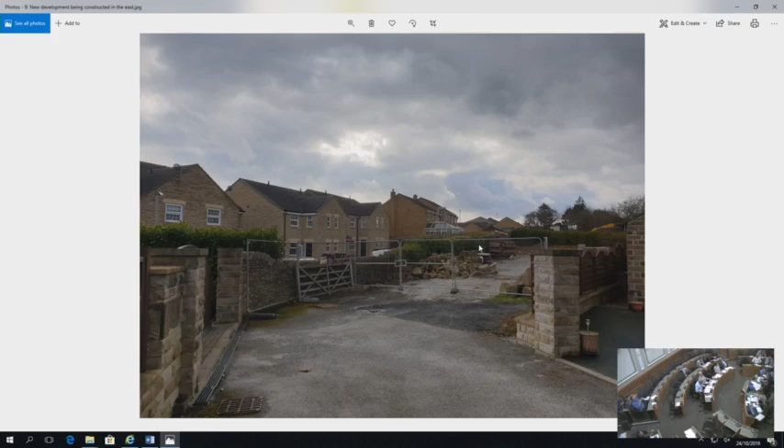Another site photo of the site showing Skelmanthorpe in the background. This photo is showing the construction of several properties, which is part of the same site allocation, but not related to this particular planning application.

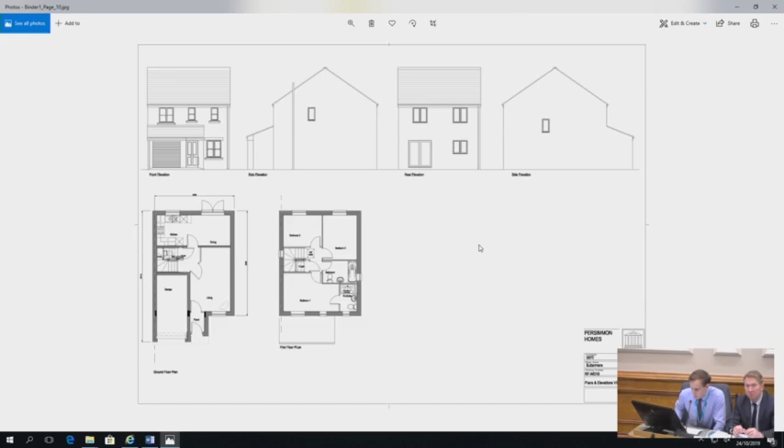Officers consider that the proposal achieves the appropriate density and mix of dwelling houses, and 20% would be affordable and would be secured by a Section 106 agreement. As such, officers consider that this proposal would contribute in creating a balanced and mixed community in line with policies LP7 and LP11 of the local plan.

During the course of the application, the Highways Development Management officers sought additional traffic surveys and key junctions to be reassessed, as well as committed development to be also looked at. This information has been carried out fully, and officers now back the proposal.

In addition, a number of changes were sought to the layout with regards to car parking, and also in terms of ensuring that a bin lorry could safely navigate around the proposed streets. Officers consider that the proposal will not have any adverse effect on highway safety and is in line with LP21, as well as the guidelines in the Highway Design Guide, as well as Manual for Streets.

However, to encourage residents to use sustainable methods of transport rather than their cars, a contribution has been agreed with Persimmon for a residential travel plan fund of £95,095 and a travel plan monitoring fee of £10,000, with £2,000 instalments for 5 years. This would again be secured by Section 106 agreement.

This discharge of surface water issue is probably the most significant issue in the southern area. Maps from 1850 show a watercourse originating west of the proposed site and flowing through the site and beyond towards Huddersfield Road. Maps from 1892 indicate the section through the proposed site has been culverted. Recent site investigation works confirm a 450mm piped culvert. It's unlikely that was done in the 1800s, presumably this was done more recently. The watercourse is culverted beyond Beedale Drive.

The current EA risk of flooding from surface water plans indicate high risk of flooding in several locations, immediately west and immediately east of the proposed site, just prior to Beedale Avenue, in the area of Heatherfold, and just prior to Huddersfield Road. The FRA and the LLFA believe the flooding is caused by a submerged outfall downstream of the site, but as there are several areas where the flow is interrupted, there must be more than one restriction to flow. How would all of these restrictions be located and rectified, as everything downstream of Beardale Avenue is culverted below ground?

If any restriction prior to Beardale Avenue was removed and the 450mm culvert through the site replaced, then the flow would increase because of the natural flooding west of the site, which provides attenuation. However, as there are obviously restrictions beyond Beardale Avenue, the extra flow would back up and increase flooding west of Beardale Avenue. It is proposed the new 450 diameter culvert would be connected to the open watercourse via a new manhole. This cannot be achieved, as the outlet from the manhole is below the invert of the stream.

It is proposed the section of watercourse immediately downstream of the site will need to be desilted so as not to restrict flows from the culvert. This will not prevent the increased risk of flooding upstream of Beardale Avenue unless flow restrictions downstream of Beardale Avenue are cleared. How will access be gained to the open watercourse? This would, in effect, create an easement which riparian rights holders would fight in the courts to prevent further flooding.

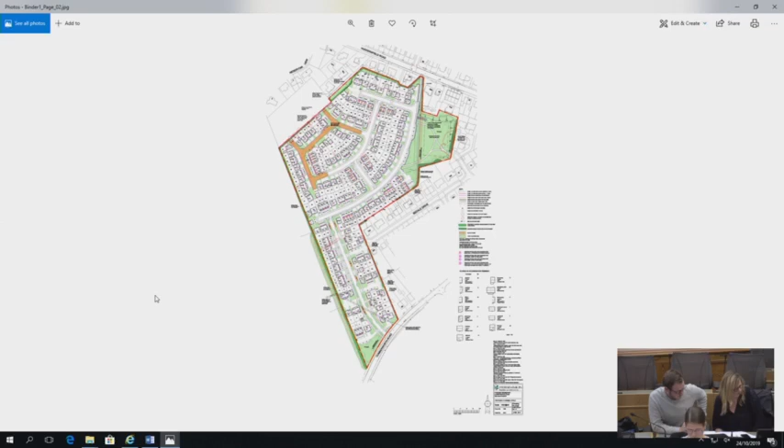Chair, thank you. As always, when you go last in these things, you tend to try and repeat what's gone before. But firstly, can I thank all those who have spoken against this application this afternoon with such knowledge and commitment, and I support all the material objections made so far this afternoon, so there's little point in repeating many of those in great detail.

So I just want to reiterate the important reasons for objections. Firstly, what I would describe as a footpath to nowhere. It's not needed and seems ill thought out, a very simple solution to previous comments about the lack of paths. It shows the developers have failed to develop a logical solution and have simply gone for an easy option, which seems to be the case in many parts of this application.

Boundary treatment, as referred to on page 119 of the local plan allocations, states that boundary treatments are required, and this application fails to address this sufficiently. We are all aware that we have a climate emergency. This council is one of the first in the country to sign the declaration of climate emergency, and yet the boundaries are not tree-lined. This would be an ideal opportunity, should committee be minded to approve this, to improve tree coverage, clearly stated on page 119 in the local plan allocations. Again, trying to do something possibly on the cheap, shall we say.

The update referred to earlier contains reference to the connection with the existing watercourse to the south of the site, and 5k has been set aside for any work required. Clearly, anyone who knows anything about drainage or building knows that 5k is woefully insignificant, won't touch any significant works needed there. So that alone is, again, we all know what the current developers' business model is - trying to do it on the cheap. 5,000 will not address any serious issues in that area.

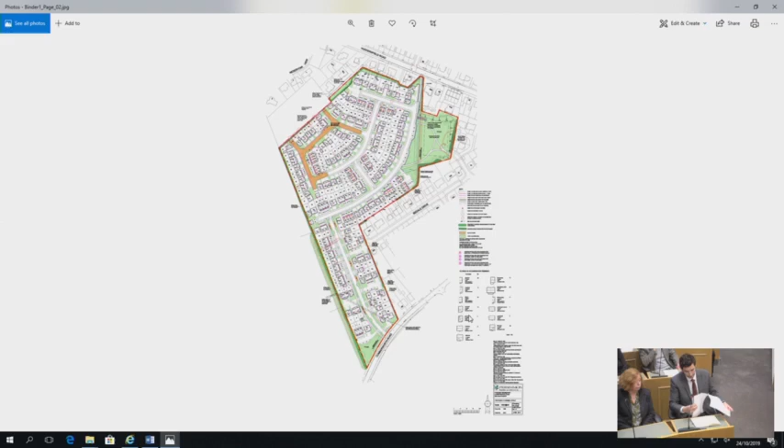Members, it's over to you. You've enough there to be going on with. Mohan.

Thank you, Chair. I've gone through this report very carefully last night and I've been on site visit this morning. But here, I'm really surprised to hear so many objections. Yeah, it seems to me they are right objections. Yeah, I had in mind only a few.

Although this application has some good merits by Section 106 contribution towards education and other things, affordable houses, but there are still some other things we need to look into. Like that, got affordable houses. I don't like affordable houses to put 8 or 10 houses on one side. It should be spread over 190 houses, not put a block of affordable next to the existing property.

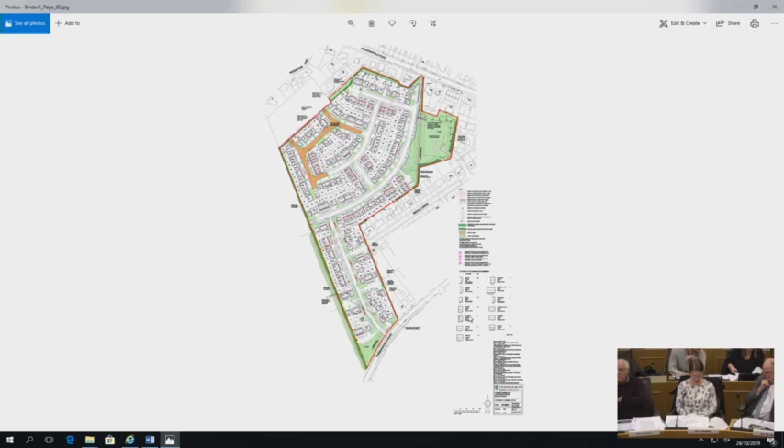Thank you, Chair. There's a couple of key issues concerning me a little bit about this application. The first is in relation to the culvert at the south of the site. Looking through the application, it does mention the contribution to the downstream area of £5,000, which has already been mentioned is not a significant quantity of money. The report also notes that it's not the responsibility of the builder to deal with that.

But I'm a little bit uncomfortable with it in general, because you've currently got a blocked culvert that's underground, and you're putting a development over the top, you're going to unblock that. What you're naturally going to do is create a lot more free-moving water, which is going to naturally find itself in that watercourse downstream of the site. In that case, you are potentially creating an issue for those dwellings who have the watercourse at the bottom of their garden, in that all of a sudden you're increasing the flow rate into that area.

I'm just not comfortable with the contribution. I know they're saying it's not the responsibility of the builder to deal with that, but I just kind of feel that this developer is doing a lot of work which is going to increase the flow rate. Is that something that needs to be looked at in a bit more detail?

The second key concern I have is in relation to the access, which has also already been mentioned, in that I do feel there should be two access points. Coming down Cumberworth Road, particularly at the top, I'm sure Highways agree it is, in terms of policy basis, an acceptable road, but looking at it with my eyes, it does seem relatively narrow.

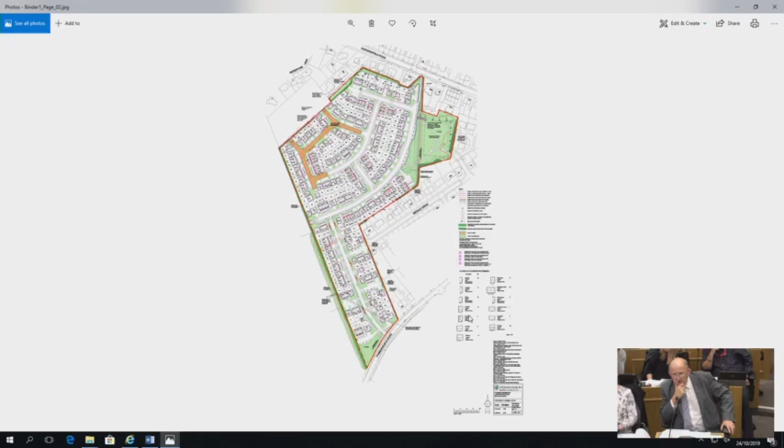Finally, I have concerns about school provision. Shelley Academy, Shelley College, not sure what they call it nowadays, but it doesn't have a massive amount of spare capacity. We're short of options. At the other side of my ward, we're losing, or maybe losing, Almondbury Community School, which is going to put pressure on things, because some of my children at the moment go over that way. It's going to put more pressure on Shelley School, College. There's not necessarily the capacity there to cope with these sizes of developments.

Most of these are family houses. The simple fact is people will be moving in with ready-made families. It's not as if we've got five or six years before they produce children of school age - they'll be moving in with children of school age and at different school ages. We need to be very, very much aware of that. I did hear Kirkburton Middle School mentioned - it's not got a great deal of spare capacity there either. Thank you, Mr. Chair.

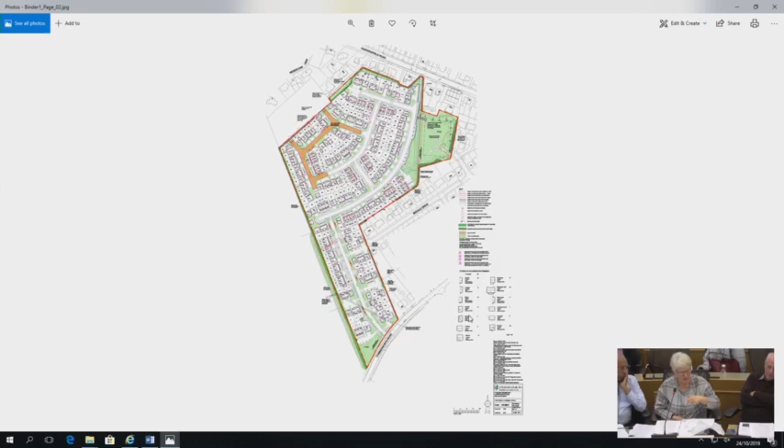Thanks, Chair. The only question I've got, and I'm probably going to answer it myself, is why is St Aidan's not mentioned? And I think that's because this development isn't in its catchment area, I presume, and therefore the only schools - the report says that the only schools in the catchment area are the two mentioned that are receiving funds.

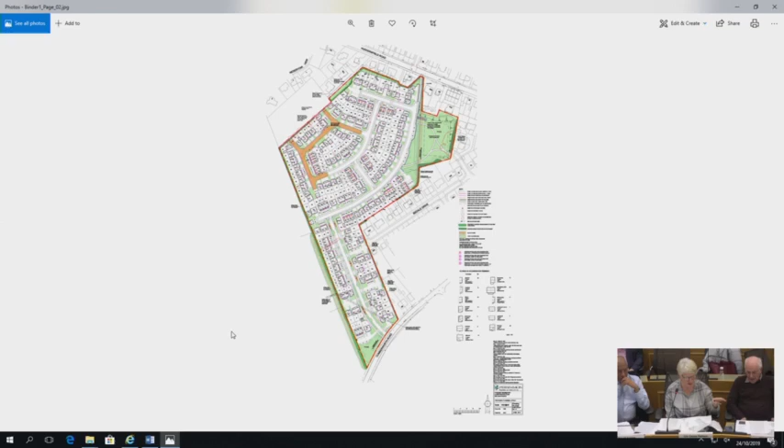This application, as colleagues have said, is in the local plan for housing, which does make it very difficult to do anything with it other than housing. We do have to get it right, though, to make sure it's the right application. So, at the moment, I'm not saying whether I support deferral or not, but... have I answered my own question?

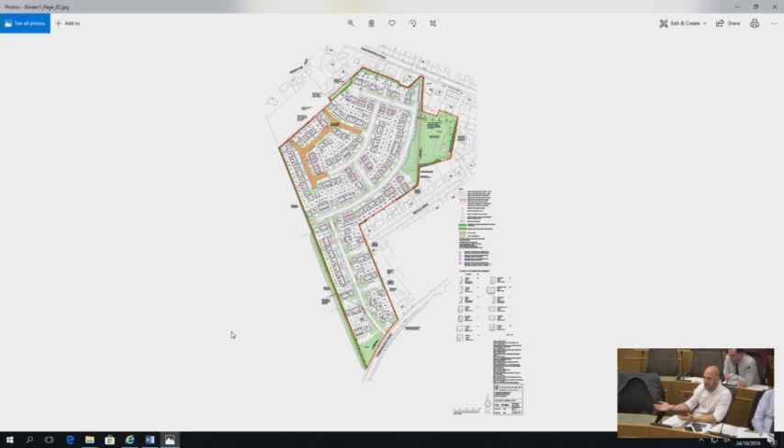Thank you, Chair. I've listened quite closely to the residents and members' debates. We are dealing with a site that is allocated for housing, as has been pointed out. That means that if we go for a planning decision, we follow what the plan says. The plan says this should have housing on it, so, okay, in principle, it will have housing. However, the detail has to be right, and a lot of what's been discussed today is about detail - comments about drainage, comments about access, comments about schools. I don't accept the comment about predetermination because no decision has been made on the application.

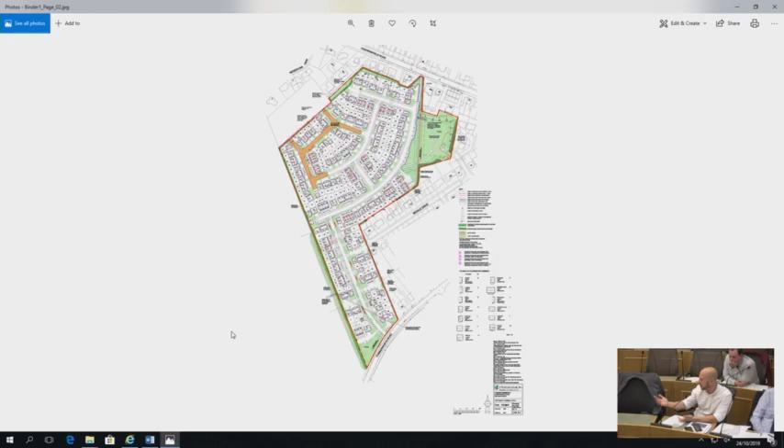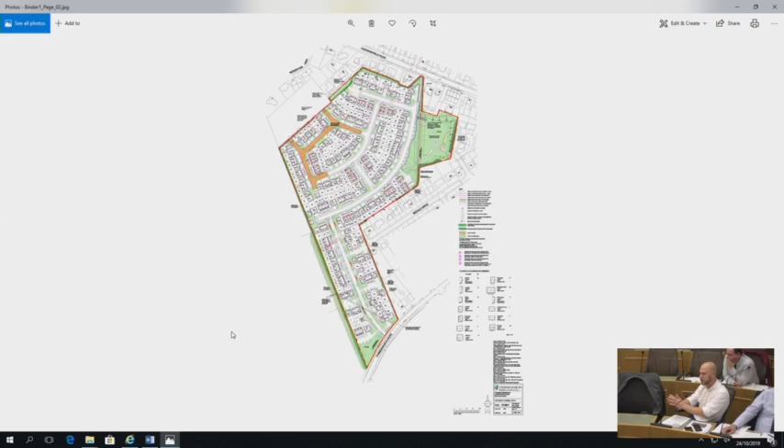But I am mindful, listening to the debate, that one, I think we should explain through the highways officer why it is a single point of vehicular access, albeit multiple foot and bicycle access points. And you need to hear from your drainage engineer to respond to the concerns rightly expressed by residents, echoed by members and local members in particular. Now, it could be that you do decide to defer - that's fine if that's what you choose, and we can bring back a further report. But in terms of completeness, I suggest the highways officer gives you their opinion and the engineer for drainage gives you their opinion, and then that gives you a complete picture from the issues locally raised, members' concerns, and a bit of your officers advising you. I hope that helps, Chair.

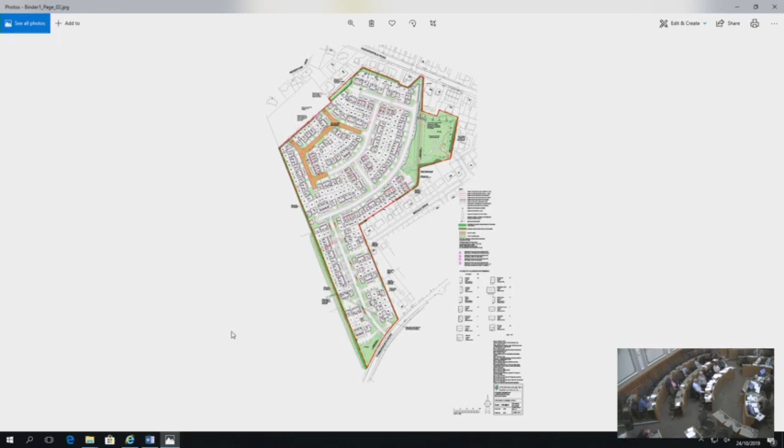Good afternoon, Chair. Paul Farndale, Kirklees Council, Flood Management and Drainage. Certainly a lot of points made.

Just one thing, there were a couple of inferences about the late reports. We do talk to each other, he knows where I'm coming from. I'll say something obvious: the report has a deadline for me, and I would meet that deadline. It has been raining a bit over the last 4 weeks, and I do have a job to do. That's why my report came in later than it usually would. If you don't accept that explanation, there's nothing much I can do about it.

In terms of the culvert on site and opening it up, that's a valid point, but if this development wasn't happening, the landowner would have a right to do that anyway, and quite frankly should be doing that. If we left it alone, you're flooding third-party land upstream. So I don't think there's going to be any decision made on deliberately flooding somebody else's land. Certainly not recommended by the LLFA, that's for sure.

I think I need to reiterate again about greenfield sites. This isn't just this site, it's every site over the last 10 years. If it is greenfield, we apply a greenfield runoff rate that mimics natural conditions. There are about 11 ways to calculate this, but we've got a set figure so the developer doesn't choose the one most advantageous to themselves. We only calculate it on the average annual event, and this is for every site, because you get one opportunity to get this right. On this site, we're talking about 6 litres per second for the southern area. The northern area goes to a different outfall.

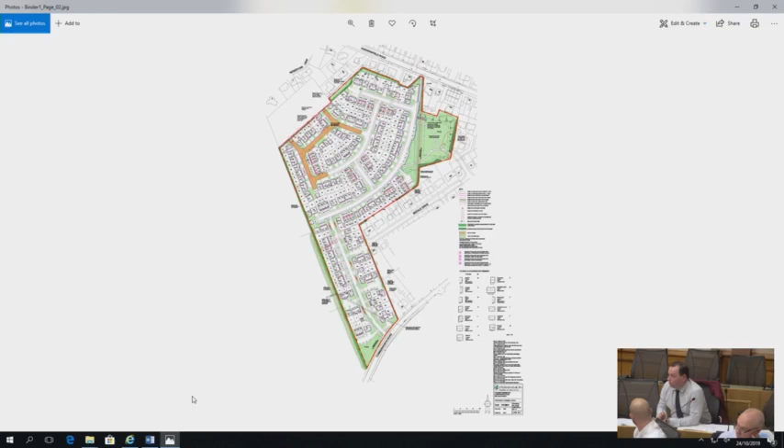Okay, in terms of the local flood authority and changing our minds, because there was a couple of inferences there, I feel I need to address that. Please follow the first objection - I always write a detailed report, some people don't like that, but I think it's open and honest. Look at the revisions that come in from ID Civils and see how they address those points. Look at the next objection that says what they have to do, in my opinion. Look at their third and then final revision D and see how they've addressed all my points. If you don't believe that, there's nothing much you can do about it, I'm afraid.

Thank you, Chair. Can I reiterate my point about deferring it? Because I think the explanation from Paul Farndale is actually very helpful, because I think what we need to do in relation to the drainage, which is one of the issues I raised, was just to make sure that what he is saying should happen is actually nailed down in the application, in the permission. I'm not sure that it's there at the moment.

I'm quite happy to continue to propose deferral. I don't know if other members have got other issues they want included, unless we can have an open deferral, which I don't think is necessarily a good idea. But certainly those issues are ones that I have picked up from the discussion, and I need somebody to second it.

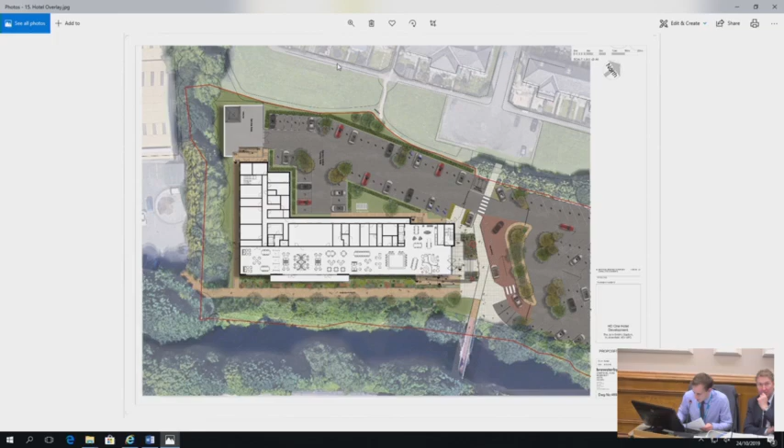In terms of urban design, officers are of the opinion that the proposal has been appropriately designed to take into consideration its local context. The hotel is L-shaped and has been positioned and designed to take advantage of its riverside location, whilst being sited furthest away from residential properties to respect residential amenity. It's considered that the proposed architectural treatment of the hotel is of a high quality and contemporary standard that would generate the necessary visual interest within the vicinity.

Although landscaping details are limited at this stage and would be secured by planning conditions, plans show a high quality public realm would be delivered with the necessary pedestrian permeability with the adjacent public rights of way and the existing footbridge. During the planning application process, comments were raised by officers in terms of site security, particularly during match days, as well as site stadium management. As such, the applicant has provided plans showing additional security features and areas to be controlled, with restricted vehicles and pedestrians, particularly on match days.

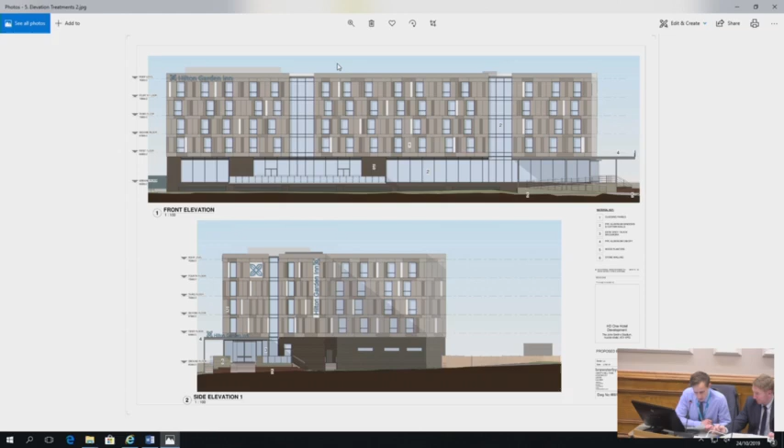With regards to highway matters, the proposed access arrangements are considered acceptable, subject to the provision of further details which can be secured by planning condition. Within the red line boundary, the car park has been adapted and extended to the rear of the hotel and now provides one less space than the current car park does. Provision is also considered acceptable based on parking accumulation calculations which officers previously requested. Also, the proposed cycle parking provision is considered acceptable.

Environmental health officers have not objected to the proposals subject to necessary conditions, seeking further information regarding air quality, noise and disturbance, land contamination, artificial lighting and odour.

In terms of flood risk and drainage, although the site sits in flood zone 3A and therefore has a high probability of flooding under the national government's vulnerability classification, to address this matter, the building has been designed in consultation with the Environment Agency, who raised no issues with the current design proposals, nor with the flood risk assessment and drainage strategy. The LLFA have considered the principle of development acceptable, but subject to more detail being provided in relation to a number of pre-commencement conditions being requested.

The site falls within the floodplain biodiversity opportunity zone, a swift nesting zone, a bat alert area, as well as being adjacent to the River Colne, which is part of the Wildlife Habitat Network. A Phase 1 Habitat Survey report has been provided, which has been reviewed by the Council's Biodiversity Officer, who is satisfied that the mitigation proposed in respect of the protected species is appropriate for the area surveyed. However, the officer has recommended a number of conditions to ensure the proposal fully accords with planning policy objectives. Subject to the necessary conditions and the financial contributions outlined in the report, officers recommend approval for this application.

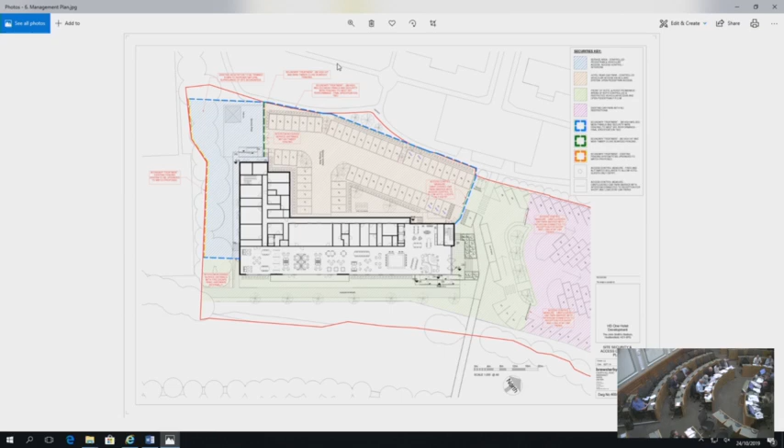Thank you. If I speak from here, is that right?

Chair, I just want, first of all, I must declare an interest on a number of counts. I'm the Cabinet member responsible for regeneration, therefore would obviously want to promote this as part of the regeneration of Kirklees. I'm also a director of the stadium, and of course this is a real asset to the stadium and so on.

On those counts, what I particularly want to draw attention to is the recommendation with regard to section 106 and the idea of a committed sum to ensure that there is sufficient to compensate the people who have been adversely affected. That big green area is used by the people in that area at the moment, and I think they should be adequately compensated. So I would expect the development to absorb the cost, not merely of the section 106, I think it's 158,000, is that the figure? Yes.

Additionally, the people in the area have been promised that jobs would be available to them at the construction stage of this development and at the final stage, used by the company that's developing the hotel, with opportunities for employment.

This is relating directly to a community of some 200 houses. It's in the bottom 10% in terms of compounded deprivation and poverty in this country, so it's an area that desperately needs this help.

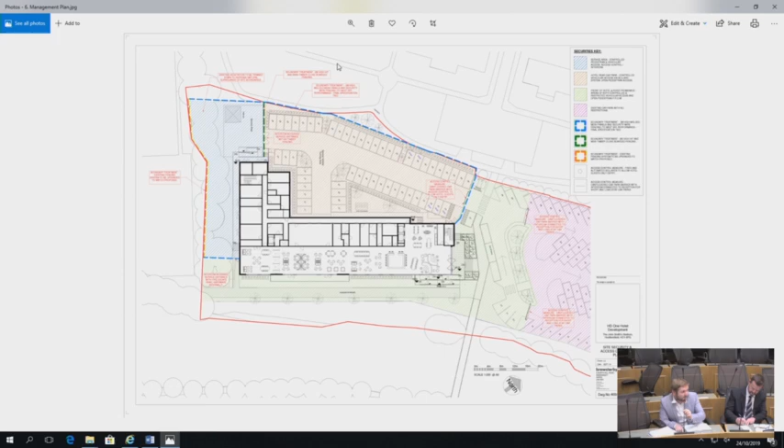Hi, I'm Andrew Chapman from Brewster Bay Architects, the architects behind the scheme. I've registered to answer any queries, questions or anything that comes up through the discussions today. I wasn't going to do a full three-minute talk and repeat everything that Chris has already put forward, he's described the scheme well already.

First of all, I'd like to introduce Gareth. Gareth's the Managing Director of Kirkley Stadium Development Limited, and he's just going to run through quickly how the hotel fits in with the outline permission, the HD1 that already exists, and a bit more about that in general.

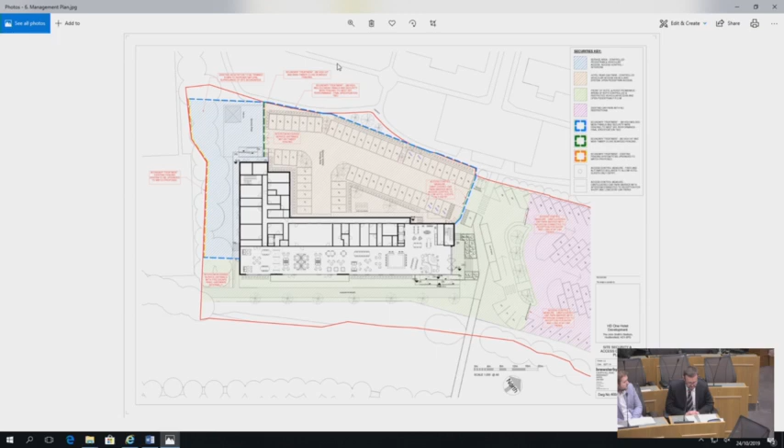Thank you, Chair. So I'm Gareth Davis. I agree with all of what Peter's just said, and if I may come back to those points at the end. My personal view is the hotel proposal represents an excellent opportunity, not just for KSDL, the stadium company, but also for Huddersfield more widely.

In terms of our existing stadium operation, we already have a very significant non-match day conference and event business. It's very important in addition to the football and the rugby, about 250 events a year. A significant proportion of those would benefit directly, annually, from a hotel provision.

But even more importantly than that, Huddersfield is perfectly located for conferences and events, being almost exactly halfway along the M62 corridor. On an annual basis, we turn down a series of applications for residential conferences, which we simply can't provide for at present. A hotel would, of course, deliver that.

I expect that we'd be full every single time we had a concert or a rugby league international, both of which we have regularly. And of course, the hotel will directly benefit both the football club and the rugby club, obviously in terms of away fans coming to stay for matches, but also Huddersfield fans who live away coming and being able to stay as well.

I've had a very significant number of conversations over years with leaders of other organisations locally about the real need for a quality business-grade hotel. Those conversations include the university, leaders of local businesses such as Syngenta and Cummins and others, and I believe passionately that the hotel will serve the wider community, not just the site.

I want to say something about Hilton themselves and the actual brand proposition. Hilton is almost certainly the best known and most successful hotel brand in the world. What a marvellous and exciting thing for Huddersfield to be bringing a Hilton hotel into town. But more than that, the specific brand proposition, the Garden Inn, is associated very heavily by Hilton with major sporting locations.

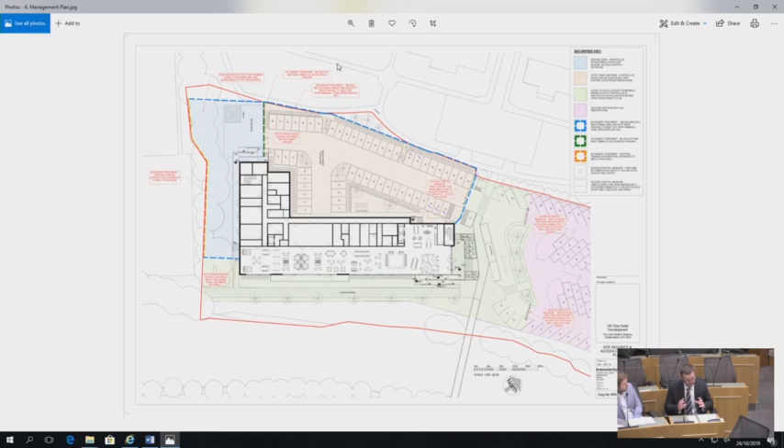As the person who operates the stadium site in terms of not match day and non-match day operations in their entirety, I think the proposed location is perfect, and I'm very comfortable with all of the proposed car parking provision detail. I think it's a fantastic catalyst as well to be seen by the development world, to be getting going with development on site in terms of the prospects of the rest of the HD1 scheme.

What Peter says about Section 106 is hugely important. What I would very briefly like to add to that, though, is that I envisage significant employment opportunities for the local community through the development of the hotel and thereafter the HD1. Thank you.

Thank you, Chair. I am pleased to see everything that the hotel will bring to the development of the stadium and to Huddersfield as a whole. But I agree with everything Councillor McBride just said in terms of giving local people opportunities for employment there, but more importantly, I think, as suggested in the report from Councillor Khan, they should have some access to the facilities. Even if local people are employed there, they may still well be denied access to these wonderful sporting facilities and all the other facilities of the cinema, the zone, etc.

It's really ironic that there are such sporting facilities very close to them, and yet this and previous development is taking away their access to recreational land. If you look at the map of the estate, the density is far higher than 33 or whatever it is per hectare. They have very little garden space, very little road space. They can't park their cars at all on the roads, which is why the car parks have been built into the green space at the back of the estate.

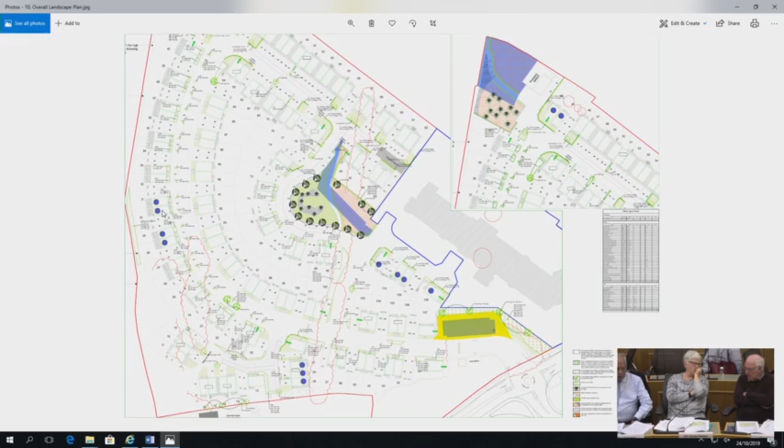We've got the pockets of open space where we have got some planting in there, and we would be securing that and getting a management plan through condition. So I would say it's probably the best we can get. Those blue dots on there just represent the affordable as well.

This has been moved and seconded. Do we agree? In favour of this application, please show. Thank you. 6 for, none against.

Next item is a position statement, and this is at Owl Lane, Dewsbury.

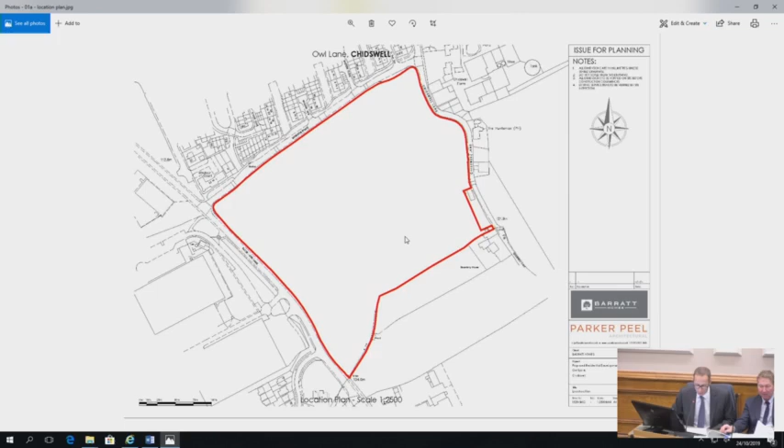Thank you, Chair. Victor Grayson, Development Management Master Planner, Majors and Minerals team. This is an application for full planning permission for a residential development of 252 units. The applicant is Barratt Homes. The site is just under 8 hectares in size and is allocated for residential use in the local plan. The site is to the southwest of the larger mixed-use allocation site MXS7, which is owned by the Church Commissioners for England and for which a pre-application position statement was brought to the Strategic Planning Committee in July of this year. The Council is yet to receive planning applications for that site.

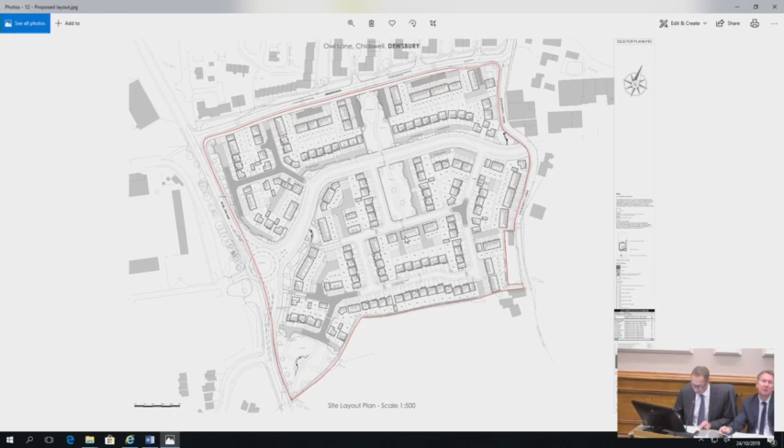252 dwellings are proposed either side of a new east-west spine road, which would connect a new roundabout on Owl Lane with the eastern edge of the site at Chidswell Lane. For the time being, a vehicular connection would not be made between the spine road and Chidswell Lane. Two open spaces are proposed either side of the spine road, and a third open space is proposed at the southern tip, the lowest part of the site.

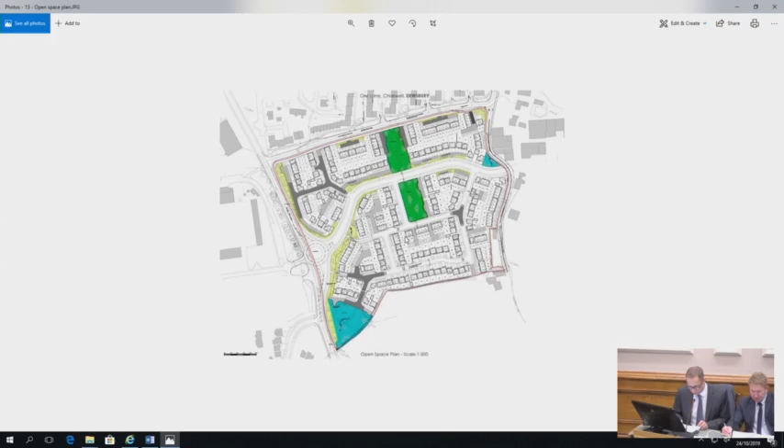The proposed materials include red and buff brick, artificial stone and grey and red roof tiles. The drainage proposals - that's just to illustrate the dwellings.

In terms of drainage proposals, the applicants propose a buried attenuation tank at the lowest part of the site, which would then discharge to the existing watercourse that runs along the site's southern boundary. Foul water will be directed to the existing sewer beneath Owl Lane.

The requirements of site allocation HS47 are summarised at paragraphs 6.2 and 6.3 of the position statement. Of particular note, the site allocation sets out an indicative site capacity of 280 units, so this site could make a significant contribution towards housing delivery and meeting targets in Kirklees.

The site allocation also requires the previously mentioned vehicular connection between Owl Lane and Chidswell Lane, to provide access to the adjacent allocated site MX57. The site allocation also requires a landscape buffer along the site's southern boundary, and it also refers to mitigation of development's impacts upon the surrounding highway network.

Because of the site allocation, which carries full weight, the principle of development and the proposed land use is considered acceptable. The highways impacts of the proposed development and the cumulative impacts of this and other developments coming forward in the area are of course a key consideration. The applicant has asserted that the proposed development on its own would have negligible or acceptable impacts on local roads and junctions.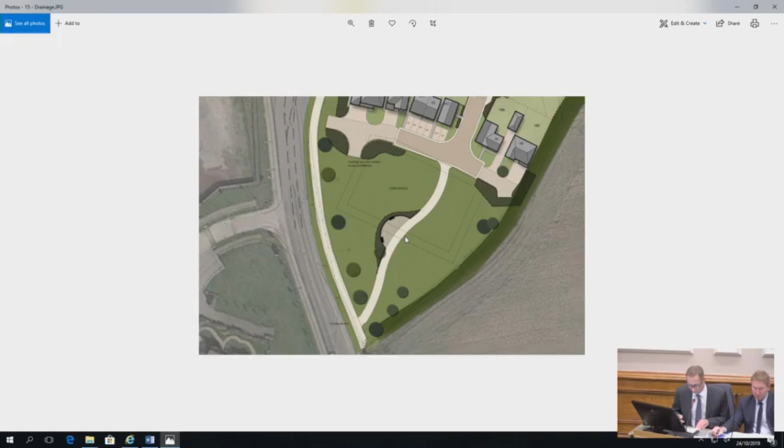Flats and possibly three-storey elements could be included, as could variations in typologies to help bring unit numbers closer to the expected 280 units. The proposed layout is generally considered acceptable in design terms, although concerns are set out at paragraphs 10.18 onwards of the position statement, and changes will of course need to be made to accommodate additional units.

I should say that the applicants, when submitting the application, had to submit it by a certain date for contractual reasons, and upon submitting the application did advise officers that they would be open to amending the scheme during the life of the application.

Open spaces are proposed in appropriate locations. Landscape officers have commented on the proposed development this morning, advising that more detail of the proposed open spaces would be needed, as would a locally equipped area of play with 20-metre standoff distances from dwellings.

A £179,555 financial contribution would be needed to address shortfalls. Of note, Dewsbury East has shortfalls in its quantity of natural and semi-natural green space and allotments.

Impacts upon the amenities of existing neighbouring residential properties would be acceptable. The quality of the proposed residential accommodation is generally satisfactory. However, several units would not meet the government's nationally described space standards, in some cases significantly so. This is a major and unacceptable shortcoming of the proposed development, and the applicant has been advised that this will need to be rectified.

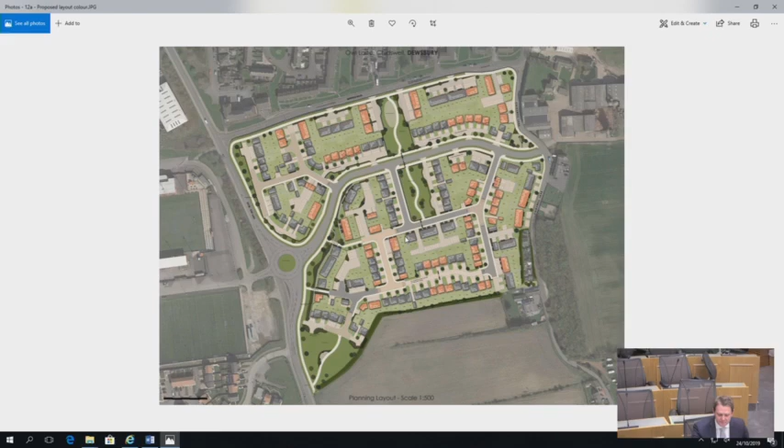Thank you, Chair, members. Thank you for letting me speak today. I'm not going to take 3 minutes. It was more just to say that we're working very closely with the council. That's something we've done for a number of months and also probably more than a year now.

We'll continue to do that through the course of the application, in particular with highways officers and drainage officers. We've been through the 193 responses and we have obviously seen the highways technical note that's been submitted this week. We'll go through that in detail as well. So I just want to give you the comfort that we'll take every comment seriously and respond with robust evidence where we can.

We're here to listen today. I'm here with my pad and pen to hear any comments that are made, any questions that are raised, and we fully intend the next time we're at committee to be able to be in a position where all issues have been resolved and you've got the evidence there to back that up. And I just wanted to say I'm happy to take any questions you might have. Thank you very much.

Thank you, Chair. As one key concern I have in terms of the design of the site, when I look at it, I look where a lot of the parking spaces are in relation to the properties. In a lot of cases, the parking spaces are detached from the properties. My experience of new estates where this happens is people might have a parking space that isn't outside their house, and then what they do is just park on the road in front of their house where there's not an allocated parking space, which then, when the roads are already very narrow in these estates down to the planning requirements, causes significant congestion.